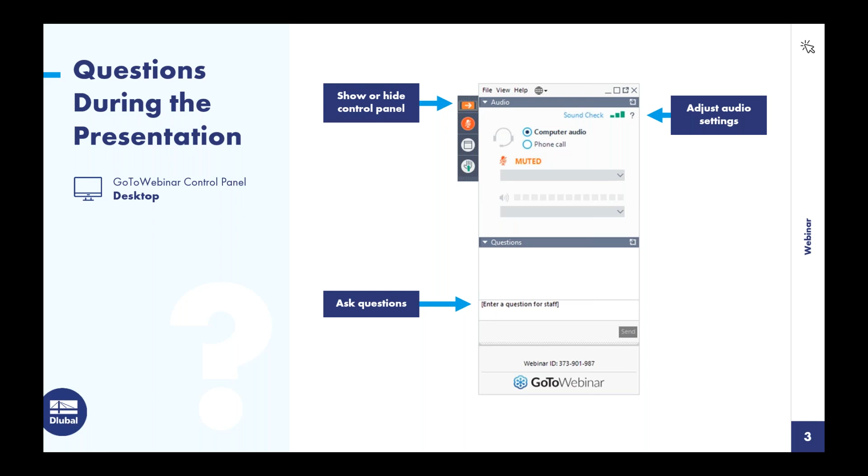Regarding the content over the next hour today, I do want to give a brief introduction to the dynamic analysis add-ons within our FEA program, RFEM 6. We will be taking a look at the natural vibration analyses of our structures utilizing the modal analysis add-on. And we'll also introduce external excitations over time utilizing our new time history analysis add-on in RFEM 6.

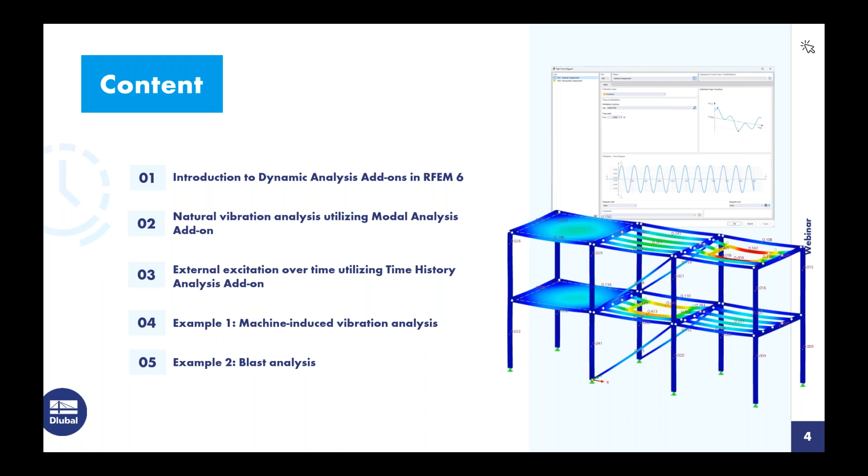We'll be working through a couple of examples. The first is going to be machine-induced vibrations with the structure shown over here on the right-hand side of the screen. And finally, a quick example at the end to showcase a blast analysis, also utilizing that time history analysis add-on.

So for those of you not familiar with our program configuration, RFEM 6 is the base program that allows us to fully model the structure where we have access to the materials and cross sections from the various standards. We can load the structure and run a full static analysis. But when you need dynamic analysis capabilities, it will require one of the 4 add-ons listed here.

The first is the modal analysis add-on. So this allows us to calculate the mode shapes of our structures and determine the natural frequencies, periods, and angular frequencies of the structure. So this is a prerequisite for the additional add-ons that you see listed here. The second is a response spectrum analysis. So this is a seismic analysis according to the ASCE 7, the NBC, and other international standards that we offer.

We also have the recently released pushover analysis. This is a nonlinear analysis for seismic deformation behavior, and currently this is according to the N2 method. And finally, we have our linear time history analysis. So this is to introduce external excitations as a function of time. So today we'll be working in both the modal analysis add-on as well as the time history analysis add-on.

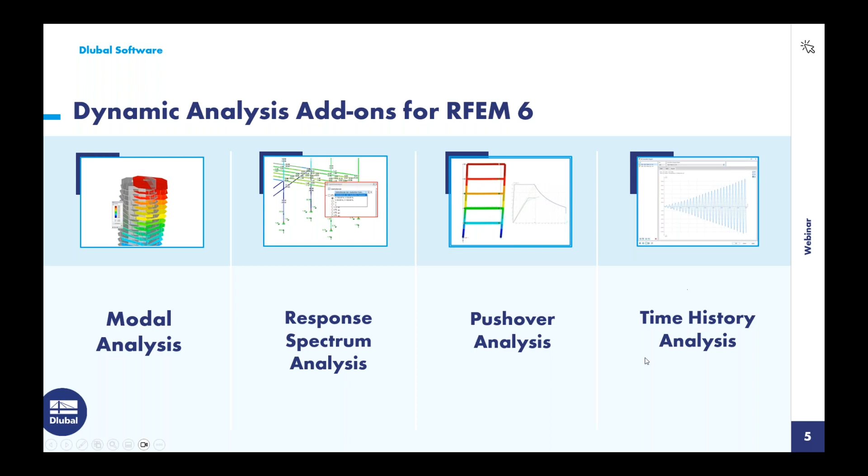So to turn here to the features within the time history analysis, we certainly have improved the integration and the workflow in our new version, RFEM 6. And when we compare this to RFEM 5, it was a little bit of a 2-part process, quite a bit different to open up the dialog box, then to define all of the dynamic time history analysis settings. Now you'll see in RFEM 6 a much more fluent workflow where we can better see that add-on integrated in the main program. We can combine user-defined or function time diagrams with nodal, member, surface, free, and generated loads.

So the point being that we have the ability here to include many different load types in correlation with these time diagrams. We can also combine multiple independent excitation functions for one analysis. We'll see this with our first example today. We do offer the linear implicit Newmark or the linear modal solvers. And it should be known that currently in the program all nonlinear elements for a time history analysis are going to either be ignored or converted to linear elements.

So for example, if you have failure in uplift for a support condition, this will simply be converted to a standard support for that dynamic analysis. Same concept with a nonlinear tension only member. Internally, this will automatically be converted to a truss element. We can consider structural damping with the Rayleigh damping coefficients or the Lehr's damping values.

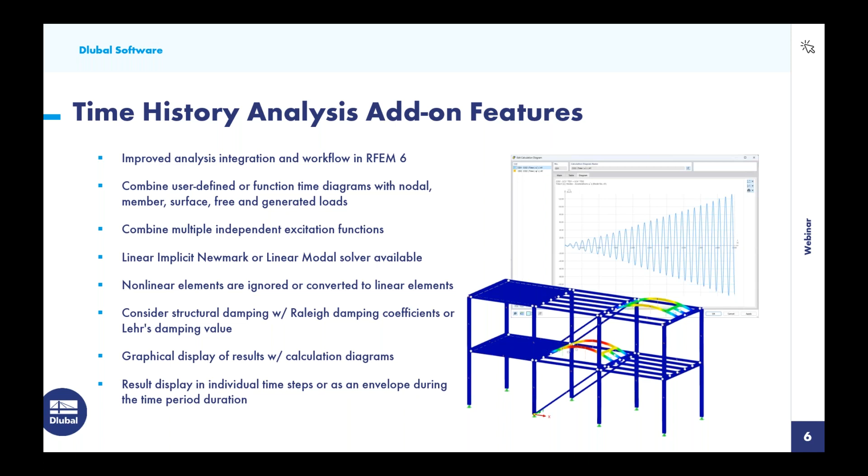And finally, when we do run our calculation, we'll see an output of the graphical results displayed, but also we can create what we call calculation diagrams. So we see a calculation diagram shown over here on the right-hand side, which just gives us a better idea of what's going on with the structure over that total time duration. We can in addition display these results for each individual time step or as an envelope solution during the entire time period. And we'll work through most of these topics today with our examples.

So we'll begin here with example number 1, where we are going to introduce these machine-induced vibrations with the steel industrial structure that you see here on this slide. We have 2 rotating machines, and you can see here where these machines are going to be placed. We have one at the upper level where this opening is on the right, and then at the first level here at the center, we'll place that second machine.

So these machines are operating at 325 rotations per minute. The mass of the machine is 2,000 pounds, or converted to 62.16 slugs. The mass of the rotor is going to be 700 pounds, which converts to 21.76 slugs. And the rotor is going to be operating at an eccentricity of 0.75 inches.

Therefore, we want to calculate the excitation frequency here. So we just simply take the 325 rotations per minute, we divide by 60 seconds, and we get a value of 5.42 hertz. So this is a really important number to remember, and will come into play a little bit later on, but just remember this excitation frequency magnitude here. The angular frequency is calculated by simply taking the excitation frequency, multiplying by 2 pi, and we get 34.03 radians per second.

Now, in order to apply this centrifugal force at these openings, we simply need to divide here by the total length of the members that make up this opening, and that's 33.6 feet. So we get a value here of 0.047 kips per foot that will be applied to the members. So this will make a little bit more sense when we go into our program RFEM to review the structure here.

So as you'll notice, we have our industrial steel structure, and the cross sections are composed of W shapes. So we have a W8x35, we have W6x9, and then for our diagonal bracing here, we have W4x13. We do have a couple concrete platforms here. If we take a look at the thicknesses, these are going to be 4,000 PSI concrete, 6 inches thick.

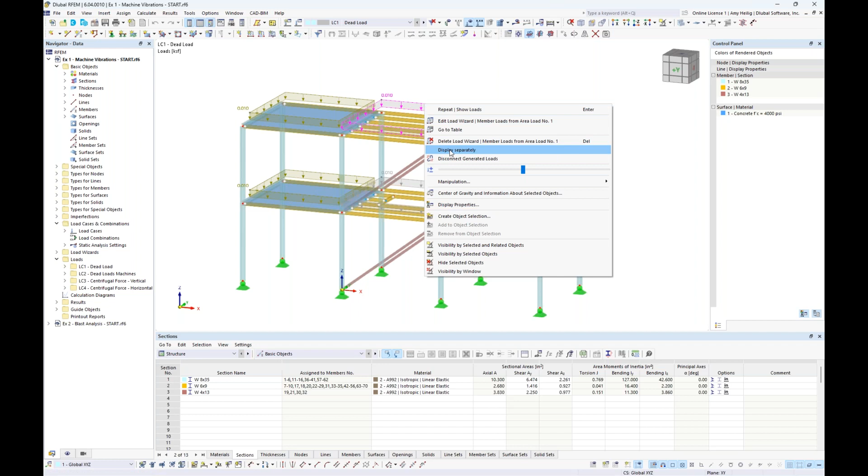So we also have the loads defined. Within the dropdown at the top, I have 4 total load cases at this point in time. We have our dead load, which is automatically going to include self-weight, but notice here that I also have applied an area load. So we have 10 pounds per square foot applied to the structure at both levels. The area load applied over on the right-hand side was used with our load wizard so that we could correctly allocate this to the members based on a one-way area load distribution. So we can right-click to display separately to see those magnitudes here.

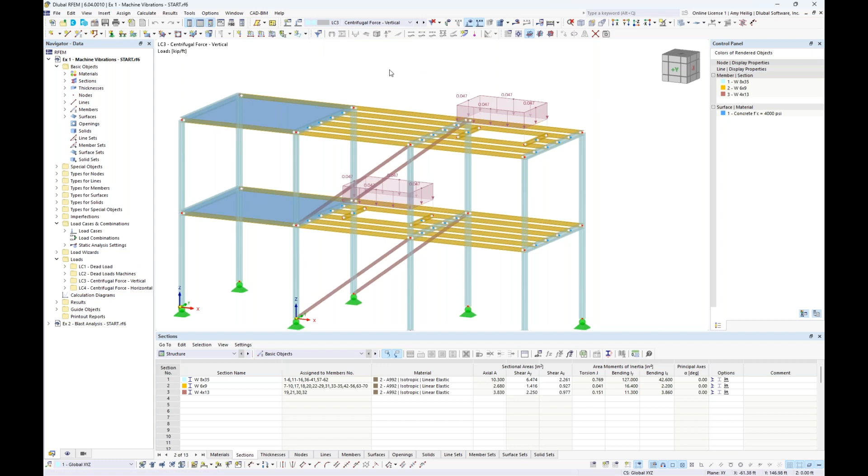Now, in addition to the basic dead load, we also have the dead load from the machine. So this is essentially just the force of the machine sitting on the structure, 0.08 kips per foot. Then going back to the PowerPoint, we have those 2 centrifugal force load cases. So we have load case number 3 here, which is that centrifugal force in the vertical direction. So notice this magnitude 0.047, which again just came directly from the PowerPoint.

If we're curious to know the total length of these members around the opening, we can hold down our control key to select all of these members. You can right click, and under the center of gravity and information, we do see here the total length given to us as 33.6 feet for these selected items.

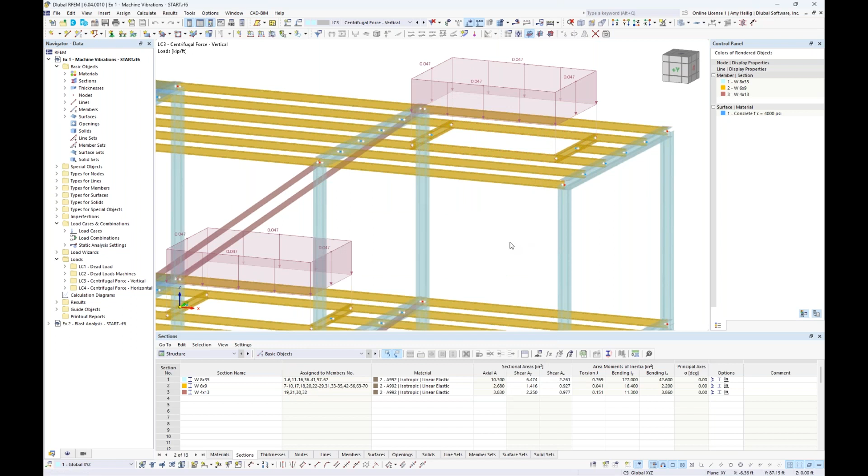So we have the centrifugal force in the vertical direction, and we also have the centrifugal force in the horizontal direction. So identical magnitude here of 0.047, but of course we want it to act in that horizontal position based on the global x-axis here on the structure.

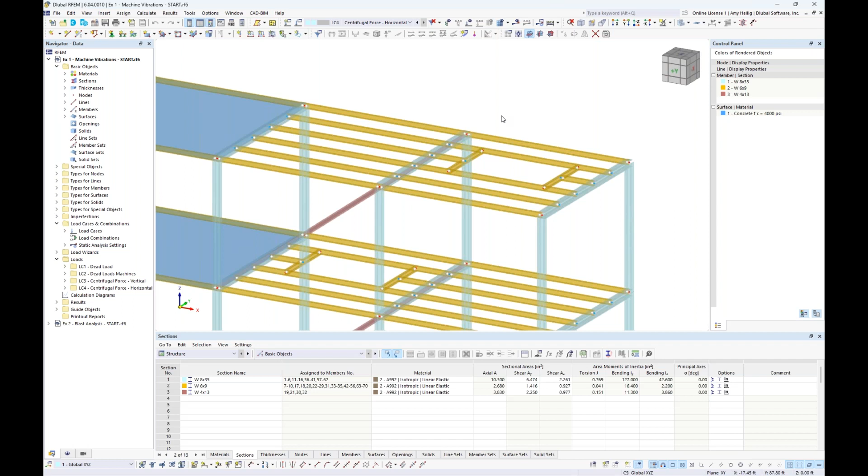So now that we have reviewed the structure as well as the loads, what we would like to move forward with now is our dynamic analysis. And we activate these add-ons by right-clicking here on the model name within the navigator to access our base data. Alternatively, we can launch the base data directly here within our quick tools up at the top.

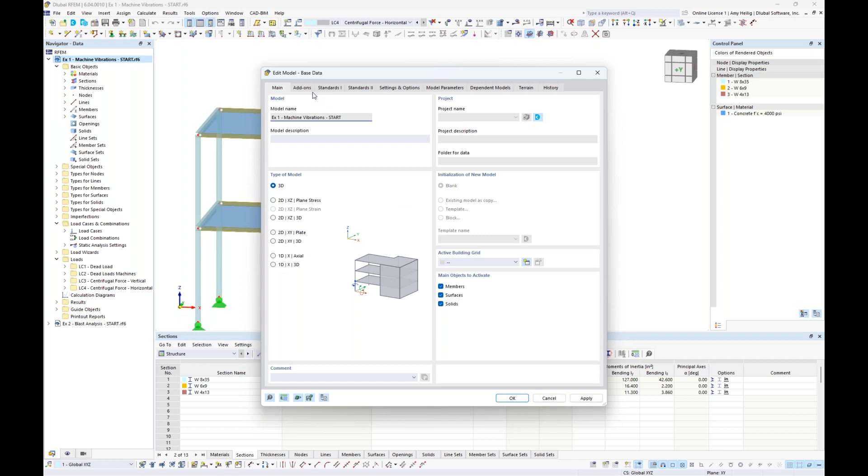So this is the dialog box that would be presented to us when we initially first create the model in RFEM, but we can always access it afterwards as well. Under the second tab here are all of our optional add-ons. So again, RFEM is responsible for the standard static analysis, but we want to activate our dynamic analyses add-ons. And for today, we'll go ahead and turn on the modal analysis and the time history analysis as well.

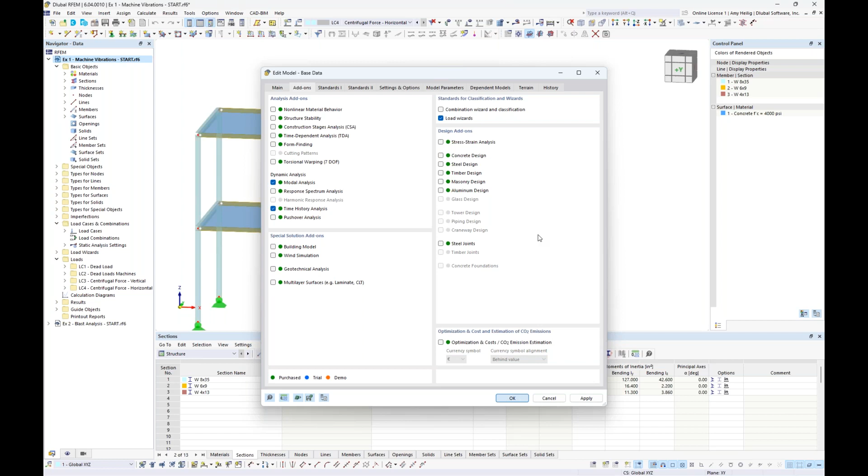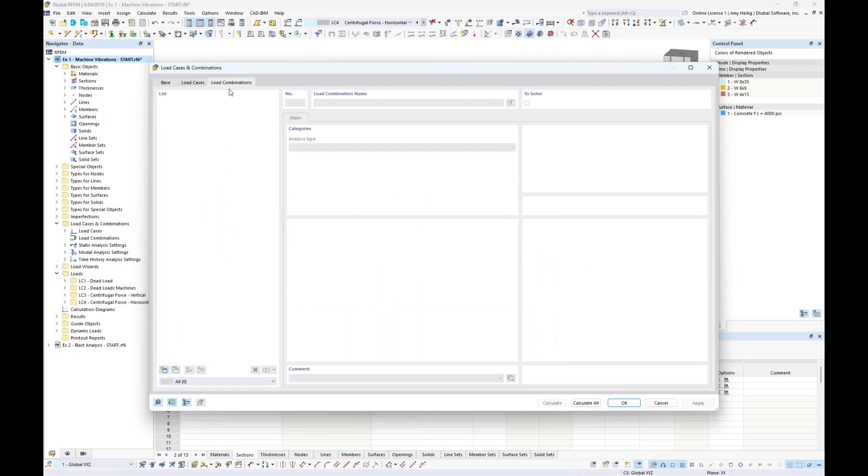So when I click OK, at first glance, it really doesn't appear that much has changed, but we want to move forward now with our modal analysis for this structure to determine what those natural frequencies are, mode shapes, and so on. So we're going to go into our load cases and combinations dialog box. And the initial step that I want to take is under the load combinations. We're going to create a new definition type here.

And in order to carry out the modal analysis, I do need to convert my dead load forces into masses. And I would like to combine the dead load from the structure, so that includes the self-weight, but also that 10 pound per square foot area load, but also take into consideration by adding the dead load of the machines. So both of these will be considered, and we can also rename this one for our mass combination.

So now that we have created this simple mass combination, we go back to our load cases here, and we're going to create a fifth load case. And we're going to give this one the name modal for modal analysis. So rather than carrying out a static analysis, we want to use our dropdown to select modal analysis. And this is available because I've activated this add-on within the base data dialog box.

So here we have some additional settings that we would like to set for the modal analysis in particular. And we do have two default options here. So you could either modify these default options, or you could create your own definition type down here in the lower left corner. For today, I'm going to increase the number of modes to a total of 15 for my calculation.

We'll carry out the eigenvalue problem according to the Lanczos solver, and we're going to utilize a consistent mass matrix here, taking into consideration the mass in the translational X, Y, and Z directions, as well as rotational about the X, Y, and Z axes.

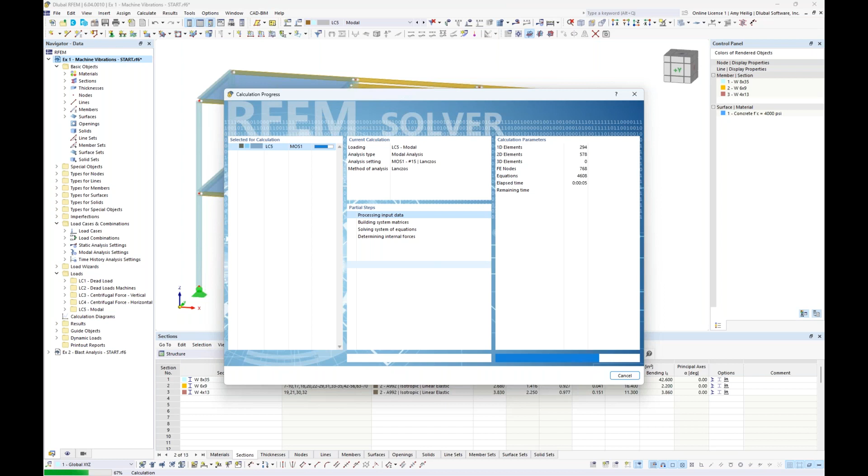So now that we have input in all of this information, we can run our calculation. So the program will quickly run through this modal analysis, calculating a total of 15 different mode shapes. And once the calculation is done, you'll notice that we get a fourth tab over here in our navigator where we can use our drop down here to select one of the 15 different mode shapes that we have solved for. And everything will sync up graphically here to show us our relevant shape.

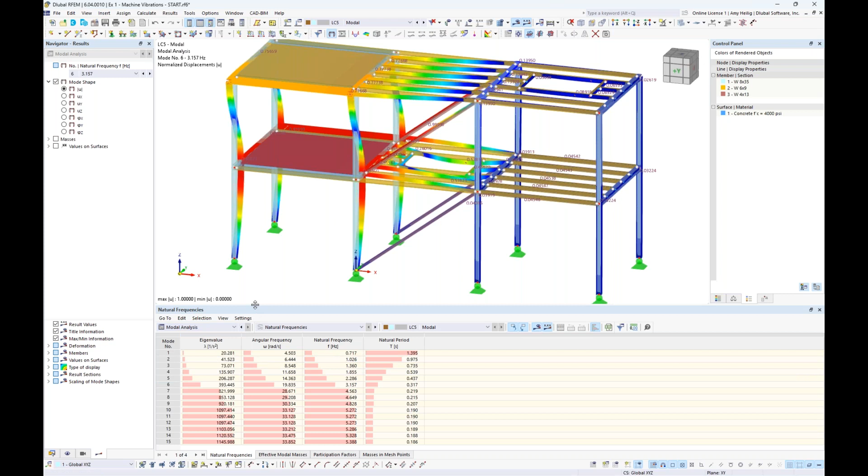But also we have the same information available to us here in the drop down within the table. So we can select the modal analysis. And again, those 15 different mode shapes are going to be shown that we can cycle through graphically within the table format. Now for each of these mode shapes, we also see the relevant angular frequency, the natural frequency, and the natural period.

So it's also important to take a look at the effective modal masses tab. So this tells us our mass participation for each one of these mode shapes, but also the total mass participation down here at the bottom for all 15 mode shapes combined. And we'd like to determine what are our dominant mode shapes for this modal analysis.

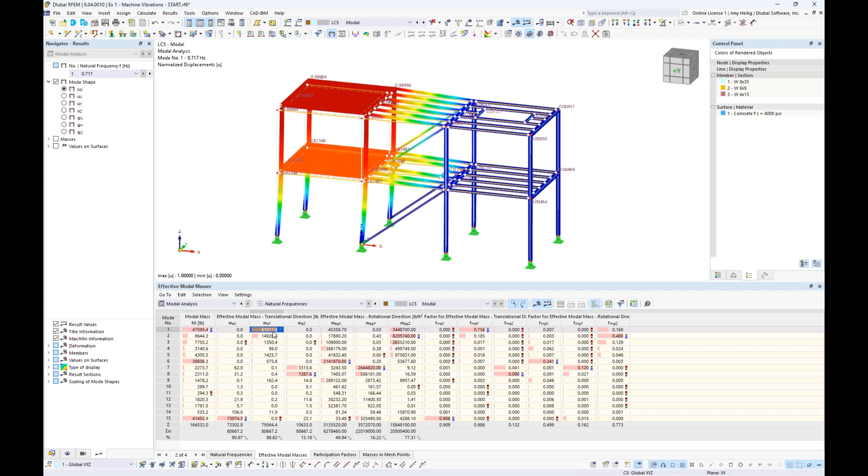So taking a look at mode shape number 1, we can see that this one has the most mass participation in the Y direction. So this is certainly a dominant mode in the Y direction. We take a look a bit further down, it looks like mode shape number 8 would be our dominant mode in the vertical direction or the Z direction.

Pretty relatively low mass participation though in this direction of only 13%. And then finally, further down, mode shape number 15. So this is our dominant mode here in the X direction. We have a total mass participation of 90.87%.

So keeping mode shape number 15 in mind, we go back to the natural frequencies tab, and what you'll see here is a natural frequency value of our structure of 5.388. So this is in Hertz, and if you remember back to the PowerPoint, I had mentioned to keep this value in mind, and you'll notice that these two magnitudes are very close together. So this should immediately tell us that we're inducing these excitations with an excitation frequency that's very similar to the structure itself, that we need to carry out a time history analysis.

And ultimately, we're trying to avoid what we call resonance. So most of you are probably familiar with this term, but it's essentially a phenomenon that occurs when a structure is subjected to an external force or vibration. In our case today, it's these rotating machines that's of similar magnitude to its natural frequency. And this typically results in an amplification of the vibration.

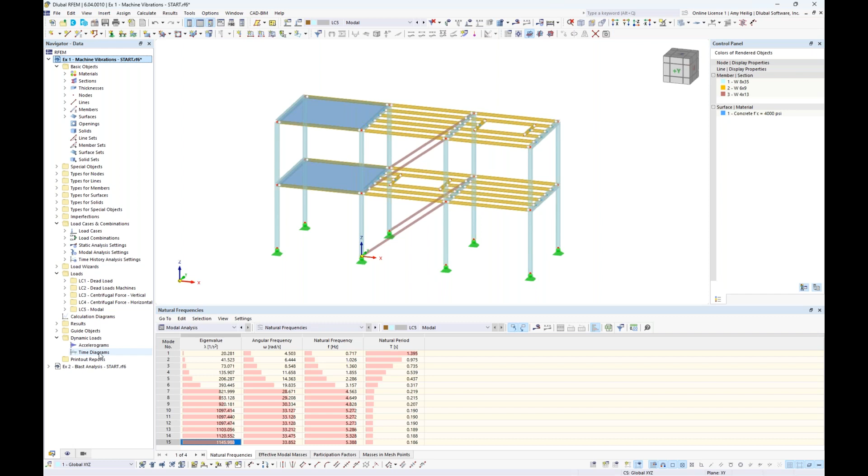So going back to RFEM and knowing that these two frequencies coincide, we'll now move forward from the modal analysis to the time history analysis. So we'll begin with the time diagram. So going back to the first tab here of my navigator, you'll notice that we have a new folder available to us under dynamic loads. And this is only available because I've activated that time history analysis add-on. And we see here where we can create our first time diagram definition type.

So we'll go ahead and click on this, and the dialog box opens where we can input either a user-defined time diagram, which you can see in table format. We can put in the time and we can put in the multiplier, essentially telling the program how this force is going to vary over time on the structure. Now, alternatively, we have the function option, which is what we'll be utilizing for this first example. We can go ahead and rename this time diagram if we would like as well.

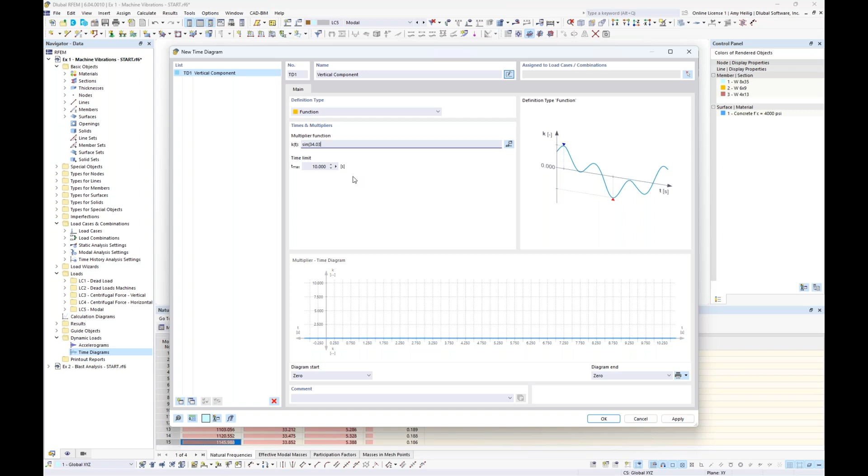So I'll call this one vertical component, and the multiplier function would now be input as a sine function. So remember, we have these rotating machines, therefore we want to represent this as a sine function where we input the sine of the angular frequency, which is 34.03 directly from our PowerPoint, and we multiply it by the time parameter. We'll go ahead and close these parentheses. We set the total time limit here to 10 seconds, which is just default. And we see our diagram populate visually at the bottom of this dialog box.

We then want to make a copy of this time diagram, and we're going to rename this one to horizontal component. Very similar multiplier function here with the sine of the angular frequency, but if you also remember back to the PowerPoint, we have this pi over 2 phase shift that's occurring between the horizontal and the vertical force. Therefore, in order to account for this directly in the formula, we will add 1.57 to account for pi over 2. Again, 10 seconds is adequate.

So if I hold down my control key and I zoom in here with my mouse wheel, we can see this diagram in a bit more detail. So for the horizontal component, you'll notice that at time equals 0, we essentially have 100% of that load acting on the structure. But as we move to a time duration around 0.04, we're going to have 0% of that horizontal load acting on the structure. Now, if we toggle to the vertical component, what we should see here is exactly opposite. At time equals 0, we have 0% of the vertical load, and at time equals 0.04, we have 100% of that load acting on the structure.

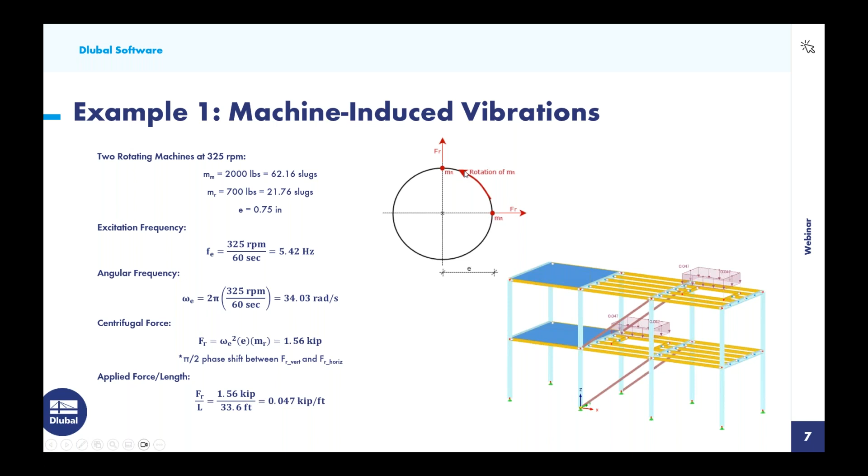So this all just goes back to this simple diagram in the PowerPoint, trying to represent these centrifugal forces as a function of one another. That again, we have 100% of the force acting in the horizontal direction, but at a phase shift of pi over 2, we want to in turn change this so that 100% of the vertical load is acting on the structure. So these time diagrams just relate these static centrifugal forces to one another and how they're going to vary over time.

So now that the time diagrams are available over here in our navigator, we want to go back to the load cases and combinations, where under the load combinations tab, we're going to create a new definition type here, and we can give this one a name of time history analysis. The analysis type is not static analysis, but rather time history analysis, available in our dropdown.

And very similar to the modal analysis, we just need to input in a few settings here. So we'll go into the default definition that's available to us, and notice that we have two options here for our analysis method, either the linear modal or the linear implicit Newmark. So we will be moving forward with the linear modal for this first example.

And this is certainly a more precise, quick, and recommended path forward for the analysis method if the structure has a low number of modes that have been calculated with the modal analysis add-on. This is also assuming that we have sufficient mass participation as well. But underneath the hood, that multi-degree of freedom system is going to be broken down into many single degree of freedom systems, and the solution of that decoupled system is then going to be calculated with the implicit Newmark solver.

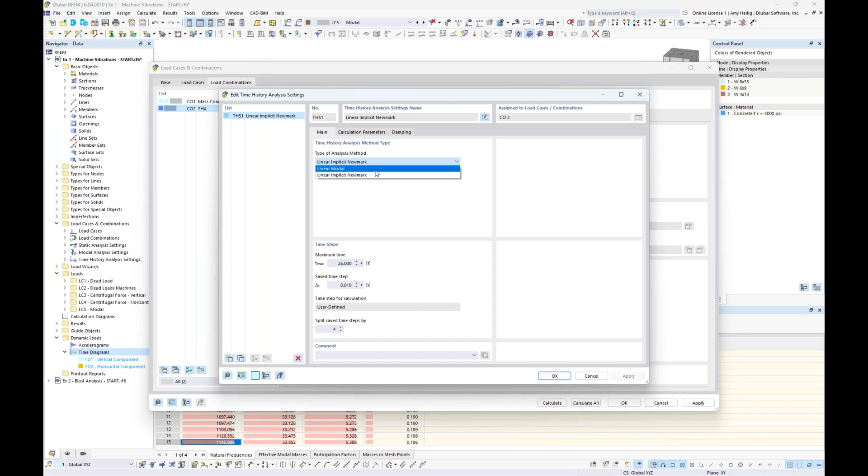Now, the maximum time is the total time duration that I would like to consider for this time history analysis. And for our example today, we will choose 5 seconds. The saved time step is the number of steps you would like to export out back into RFEM to view the results. So obviously we don't want to set this to something too small because it's just going to take the program a lot longer in order to populate all of those results. So we'll leave this as 0.01.

Now, the split saved time steps is further going to divide here the save time steps, but this is what's actually used in the calculation itself. So I'm going to further divide this by 10 so that technically with the actual calculation, I'm calculating every 0.001 seconds, but I'm only going to export out 0.01 seconds for my results.

Now, additionally, you'll notice that we do have a damping tab, and for the linear modal analysis, we have both Lehr's damping available, where we can directly input here the damping constant, quite simple. We also have the Rayleigh damping, where we would need to input the alpha and beta coefficients. Now, alternatively, just to show you, under the linear implicit Newmark, you'll see here under damping that only Rayleigh is offered. So that is required for this calculation method, that alpha and beta.

But we do have a function here in the program where we can automatically calculate from Lehr's damping. So you'd want to determine from the natural frequency analysis, what are your two dominant modes? And from these two dominant modes, what are the relevant natural frequencies? What's the Lehr's damping constant you're trying to achieve? And then the program will automatically calculate both these alpha and beta coefficients. But going back to a linear modal, initially we're not going to put in any damping for our first calculation here.

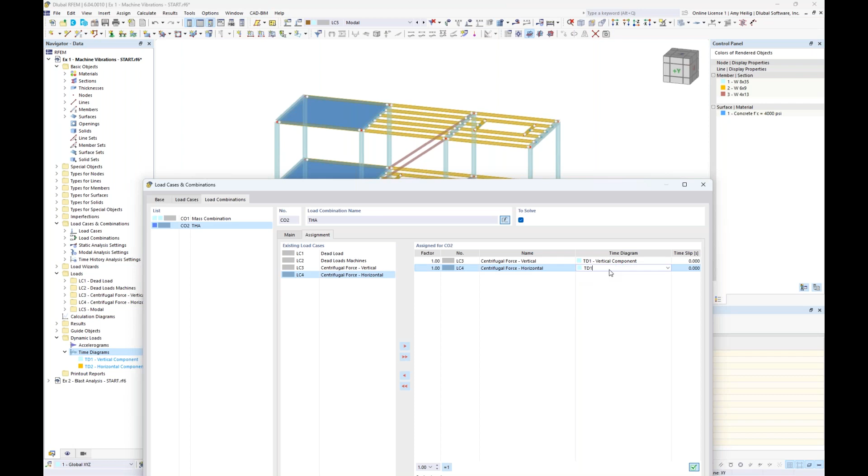And the first centrifugal force in the vertical direction is, of course, going to be related here to my time diagram in the vertical direction. But my centrifugal force in the horizontal, we want to set this to the time diagram in the horizontal direction as well. So now that we have set the static load cases to the relevant time diagram, we would like to run this calculation. Now, we don't need to rerun the modal analysis. The program has already solved for this. Our results are saved here.

And then we move on to the time history analysis, taking into consideration the full 5 seconds here of how these rotating machines will be directly applied to the structure. So once this is done solving, we are presented yet again with our results directly within our navigator over on the left for time history analysis, as well as in our table, we see time history analysis available here as well.

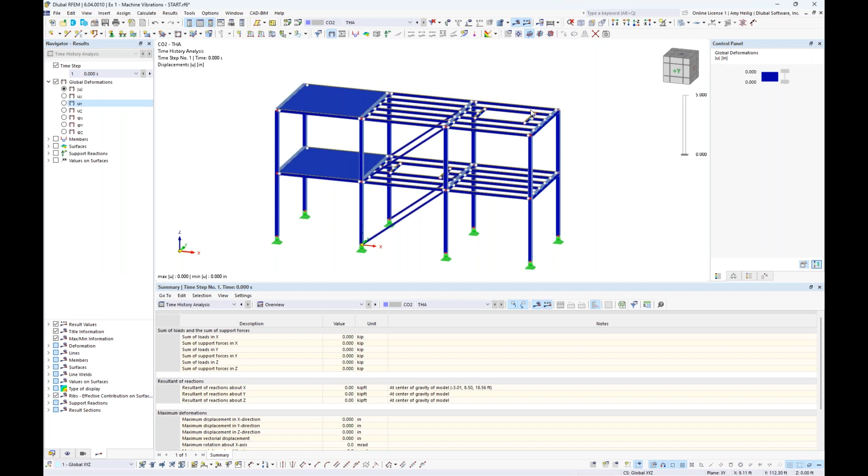So initially you'll notice that the program allows us to view, let's say, the global deformations of the structure based on the relevant time step. So currently at time step 0, nothing's going on with the structure here in terms of the deformation. But as we continue to cycle through these time steps, that's where we start to see the relevant deformed shape based on those centrifugal forces acting on the structure.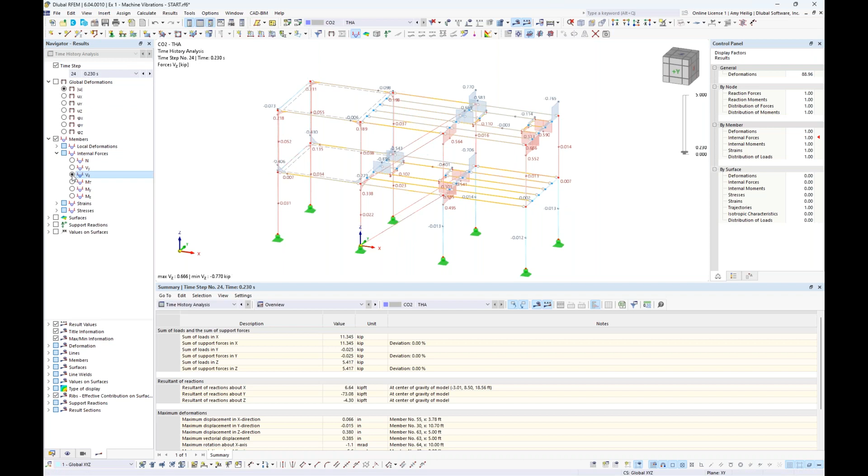And the same concept is available for other result information like our member internal forces. So for example, we can view the axial forces at this particular time step, or we can view bending moments, or perhaps we want to view the shear forces. Surface internal force information is available, and also support reactions. So we can turn those on again for this particular time step.

And all this information is also available here in table format. So we can filter here to the results by the member, for example. And as we click through this table for the internal forces on the member, what else you'll notice is that the program syncs up automatically here to tell me exactly which member I'm looking at. And that red arrow is going to point to where the controlling internal force is that I'm currently viewing along the length of the member.

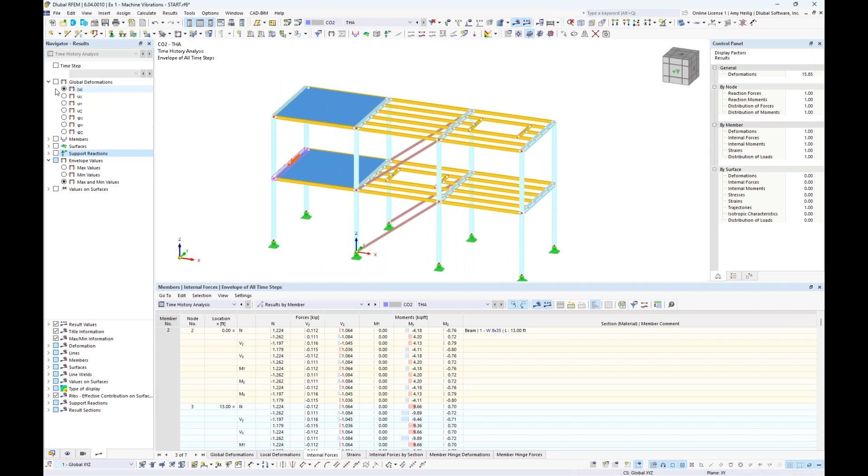So this is for each individual time step, but if we're rather interested in an envelope solution for the full 5-second duration, we can just simply turn off this checkbox. So now the program is going to give us our results here over the total time duration. So we can turn on, for example, the global deformations.

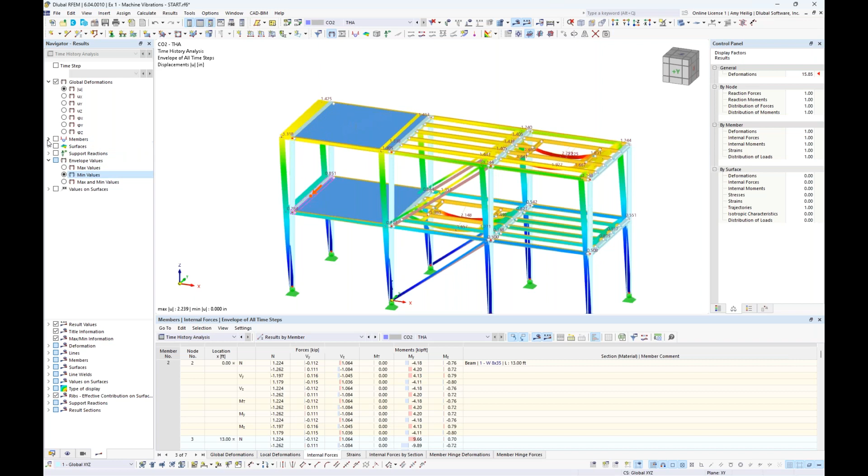And if we look graphically, we're seeing 2 deflected shapes here. And this is just simply because you'll notice under the envelope results that both the max and the min values are currently turned on. If we're interested in only the max deflection, we can toggle to this, maybe only the min deflection. Same concept for our member internal forces. So for example, if we take a look at max and min for our axial forces, you're going to see both of these values displayed on the member, but we could certainly toggle to any one of those other options.

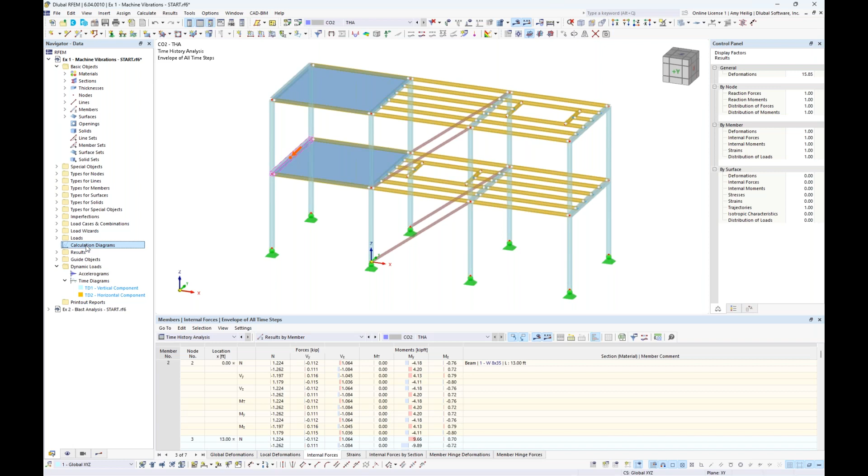Now, all of this information shown graphically is certainly very helpful, as well as in table format, but I do want to go back to the navigator here to discuss the calculation diagram. So I'll go ahead and collapse some of these folders, and you'll notice the calculation diagrams is available here directly within the navigator list. And this is going to be highly used for any time history analysis. So this is going to give us more information about the structure's behavior over the total time duration.

So under the first definition type here for my calculation diagram, we want to toggle this to a time history analysis. Now, the program is automatically going to display a diagram here based on the max deformation. But notice within this dropdown that we really have a lot of different options to choose from, including nodes for the global deformation, maybe want to view the accelerations on the nodes or member internal forces. So I'm going to start here with the global deformations of the nodes, and I'm going to pick this particular node up here at the opening where one of my machines is sitting.

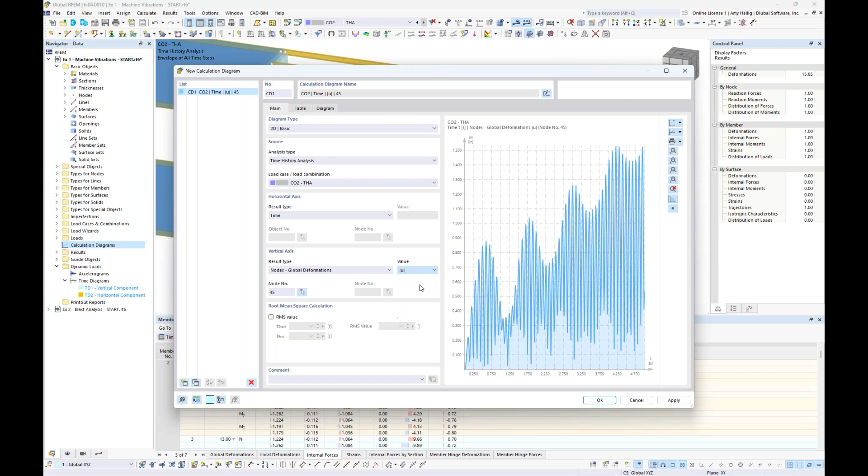And currently the value shown here under this second dropdown is going to be the total deformation, considering all three directions, X, Y, and Z. But instead, I'm going to view the deformation in the X direction only. And when we take a look at this, we can clearly see that resonance is an issue, that this deformation in the X direction is just continuing to grow as time goes on. And likely if we were to expand the total time for a time history analysis, it would just continue to grow. We see here a value of 1.4 inches.

So if we toggle instead to something like our acceleration on this node, and we want acceleration in the global X direction, again, the diagram looks very similar. So if we take a look at the total magnitude here of this acceleration at the end of the 5 seconds, it's 141 feet per second squared. So this is certainly not an acceptable value.

And when we're interested in what are some of the recommended acceleration limits, there's plenty of resources out there. If we take a look at AISC Design Guide 11, for example, it really depends on what your structure is going to be used for. Something like an office is going to have a much lower tolerance value for acceleration versus something like a gym.

But somewhere at the low end, it should be around 0.5% G, and somewhere at the higher end of acceptable tolerance values here is 5% to 10% G. But in any rate, we are far over that with this particular structure. So we need to make some modifications.

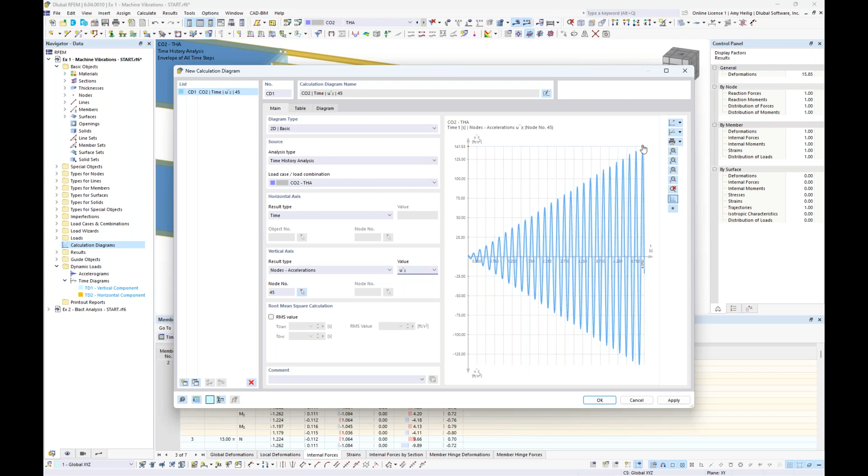And the first thing that I would suggest doing is to consider damping. So we'll go back to the load combination here and that time history analysis. We've already been within these settings before under the damping. So this time we want to consider using our dropdown, the Lehr's damping constant. So for this particular steel structure, we'll go ahead and set this at 0.02. So we'll click OK. The program tells us we need to delete our results and rerun the calculation.

Now, nothing changed with the modal analysis. We should see the same results there. But now with this time history analysis, we've introduced the damping matrix in consideration with the dynamic analysis. So we should see slightly different results here now that we're considering damping.

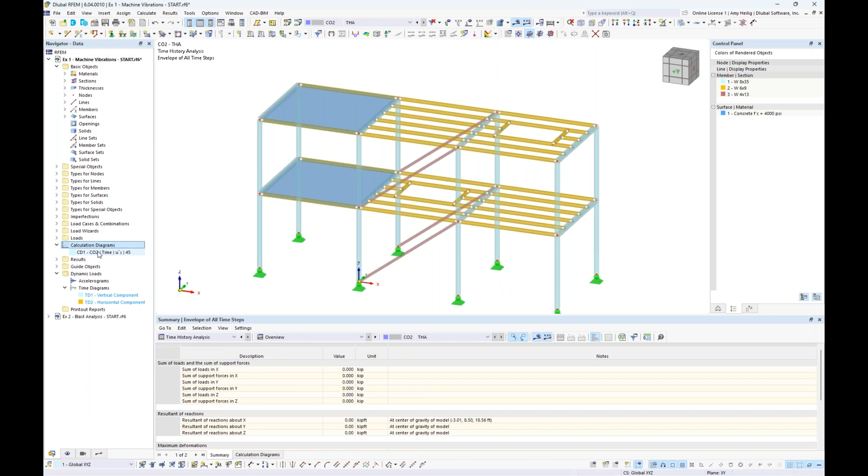So now that this is finished, we will immediately go back to that calculation diagram. So we can see it listed here in our navigator. We don't need to redefine it. It's already been saved. We're currently looking at the acceleration of node number 45 in the X direction, and our diagram certainly looks slightly different. We're not seeing maybe those accelerations growing linearly, but rather leveling off.

If we take a look at the total magnitude of the acceleration, it is around 40.79 feet per second squared. So this is probably still an issue. The acceleration is far too high. So we need to continue to make additional modifications to this structure.

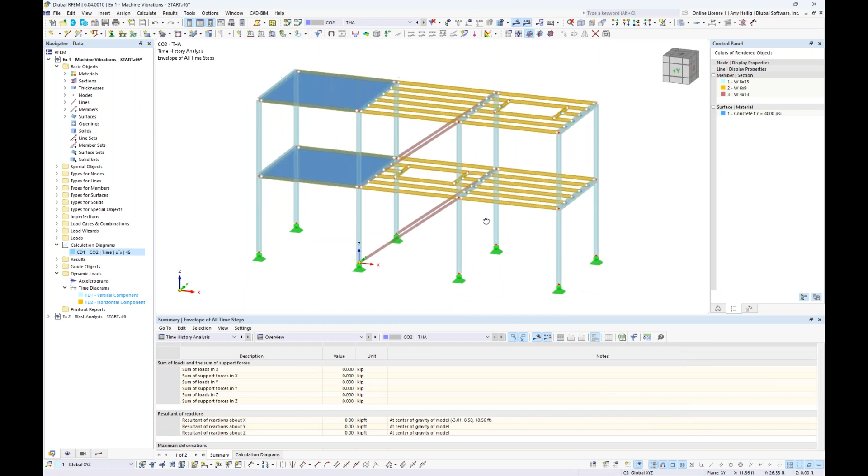Well, the obvious choice would be to change out some different cross sections here. Maybe we can modify the cross sections, which will in turn affect the stiffness, and our modal analysis may output different natural frequencies now that don't necessarily match the rotating machine. So we can do this directly with the cross sections listed. So for example, these diagonal braces, W4x13, we could simply double click and exchange out to a different W section.

But the question might be, well, do we go with a cross section that is bigger? Do we go with a cross section that's smaller? And we could certainly trial and error and keep running through these different calculations. But I'd like to show you a different method, which is available under the special objects folder. It is called the structure modifications.

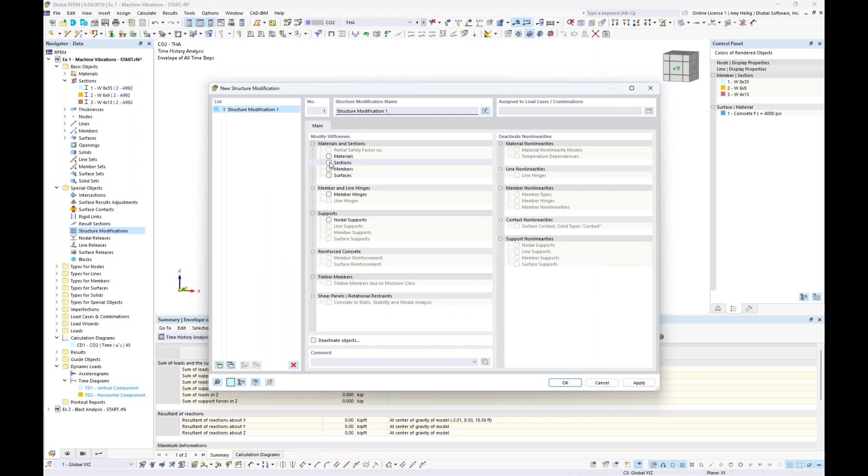And we can go ahead and double click to create our first structure modification where we activate the sections option. And we get a new tab here under sections with our 3 different W sections, including the W4x13 for those diagonal braces. And we have the ability to directly apply a factor to the cross-sectional area, which in turn is going to increase or decrease the axial stiffness of the member used in the calculations.

So rather than exchanging out the cross-section, we can just more or less play around with the stiffness properties directly to see how our structure is affected. So under the W4x13, the first thing I want to do actually here is to give it a name. We'll call this one double stiffness, and the area factor will be set to 2.0. The area in the Y is also set to 2.0, and area in the Z is 2.0. So again, just increasing the stiffness twice the amount here.

Now we're going to make a copy of this structure modification, and we'll call this one half stiffness. So in this scenario, instead of applying a factor of 2.0, we'll apply a factor of 0.5, just to again see how the structure responds to maybe a smaller cross section without actually swapping out those cross sections quite yet.

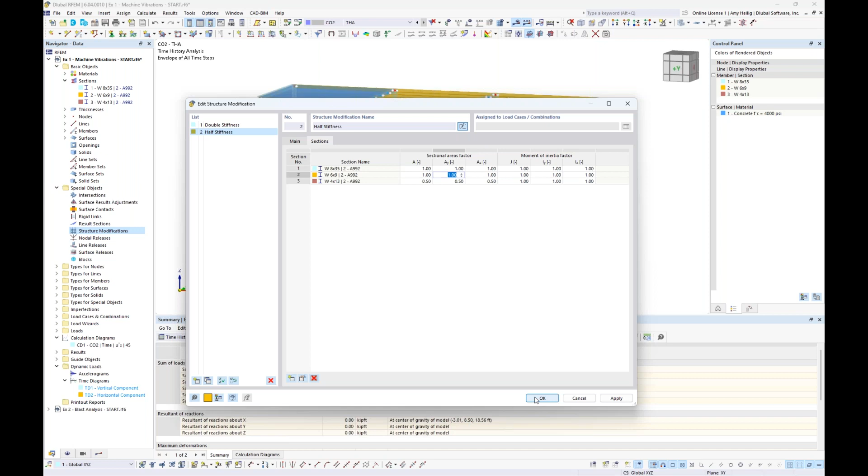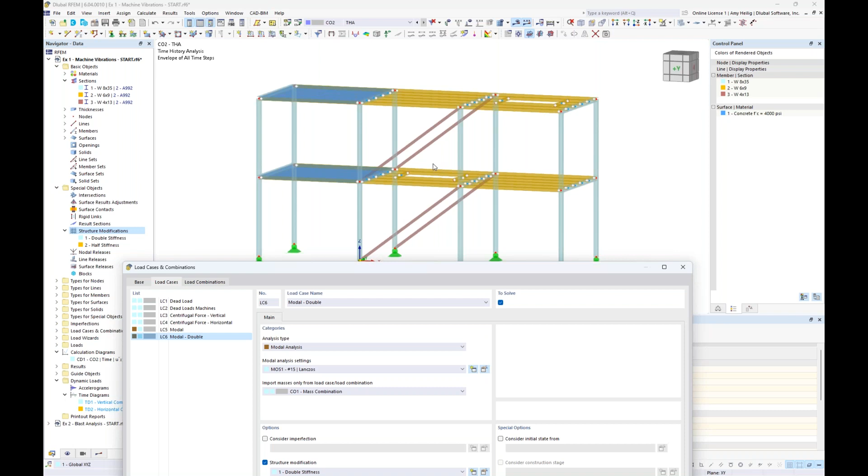So now that we have these structure modifications shown here, we can go back into our load cases and combinations. Under the load cases, remember we have our modal analysis with no structure modification sets, just the original results that we have already looked at. But I'm going to make a copy here, and I'm going to call this one double for double stiffness. Under the structure modification, we can turn on that definition for double stiffness that we just created. Again, where we're going to increase the axial stiffness times 2 for these diagonal braces.

I'm going to make an additional copy here, and we're going to rename this copy half so that we can activate here half the stiffness for the diagonal braces. Well, it's not just enough to do it for the modal analysis, but we also need to apply this to the time history analysis. So again, I can simply create a copy here, and with our original time history analysis, we will first rename it, but notice that with the linear modal, we can now import in the modal analysis where we have increased the stiffness by 2.

The program automatically detects that we also want to apply this structure modification to the time history analysis, because remember we have these dynamic load cases that vary over time. So we need to also apply that stiffness modification to this scenario here.

And we make an additional copy, and in a similar manner, we call this one half, and we're going to import in the modal analysis with half the stiffness set. And then you can see here the structure modification half stiffness is also set for the time history analysis.

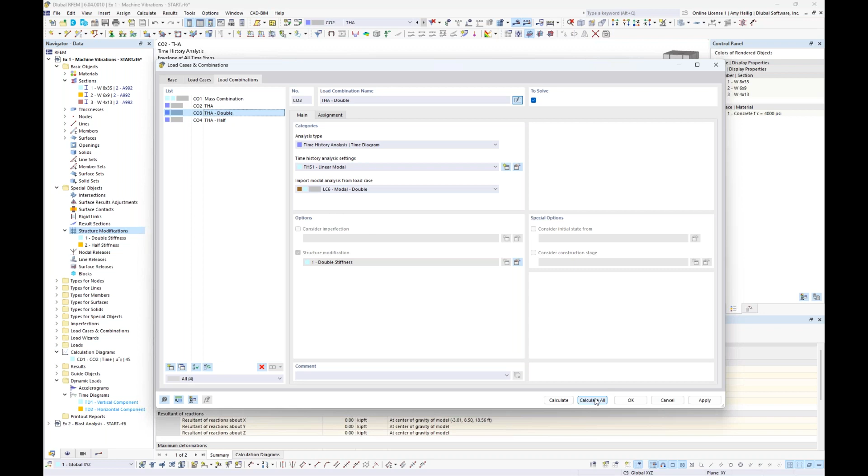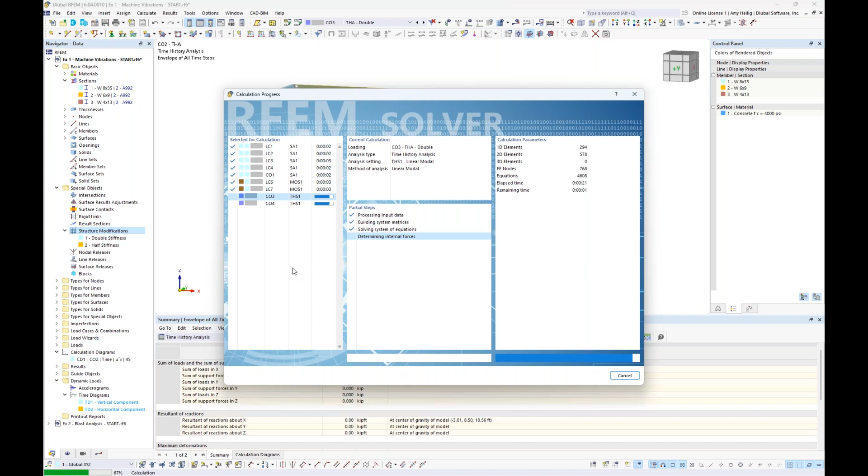Okay, so now that these are run with the relevant stiffness properties or modifications set, we can just go ahead and click calculate all. So this is going to cycle through first my load cases here, which is fine. We're not really concerned with them. But then you'll also notice that the program is going to go ahead and calculate both of those modal analyses with the stiffness modification set, and then we're now running through both time history analyses with the additional stiffness modifications.

So the first thing that I'll go to now that the calculation is done is those calculation diagrams. So we'll go ahead and double click on here, and we see the same calculation diagram, but that's fine because we're still referencing that original time history analysis with the same cross section, same stiffness, nothing changed.

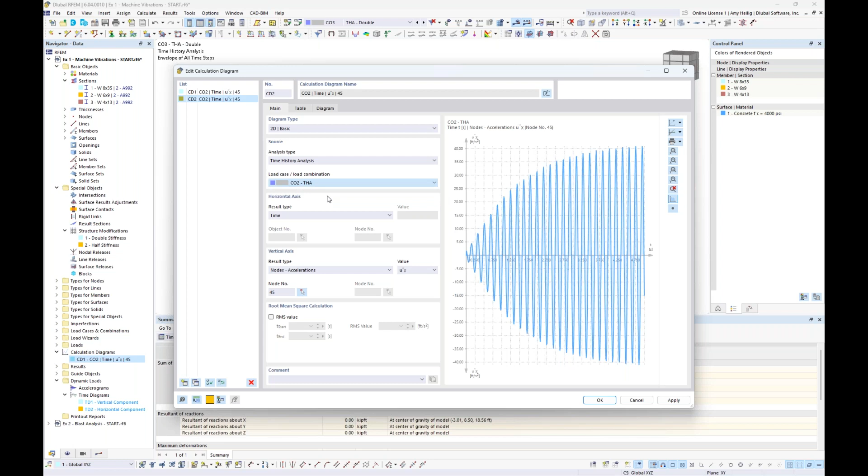We make a copy of this, and this time we want to reference the time history analysis with the double stiffness. And now we see that our acceleration of that node in the X direction looks quite different. No longer do we see that acceleration growing, but rather it remains pretty constant over the 5-second duration. And if we take a look at the total magnitude of the acceleration, it's now around 0.4 feet per second squared. So this is much better and well within those tolerance values.

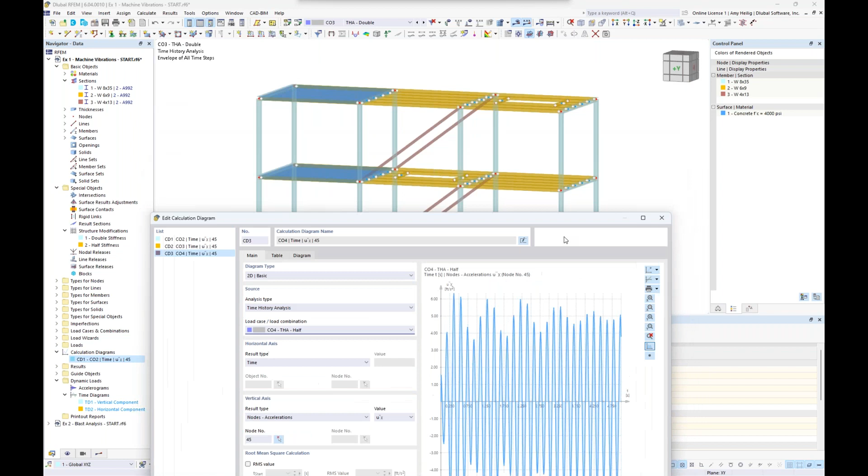Perhaps we make an additional copy here to select half the stiffness. Again, resonance is no longer an issue, so we don't necessarily always have to increase the cross-section size. Even decreasing a cross-section size may allow you to overcome issues like resonance. However, we do need to still take a look at the total acceleration values, a little bit higher here, around 4 to 5 feet per second squared.

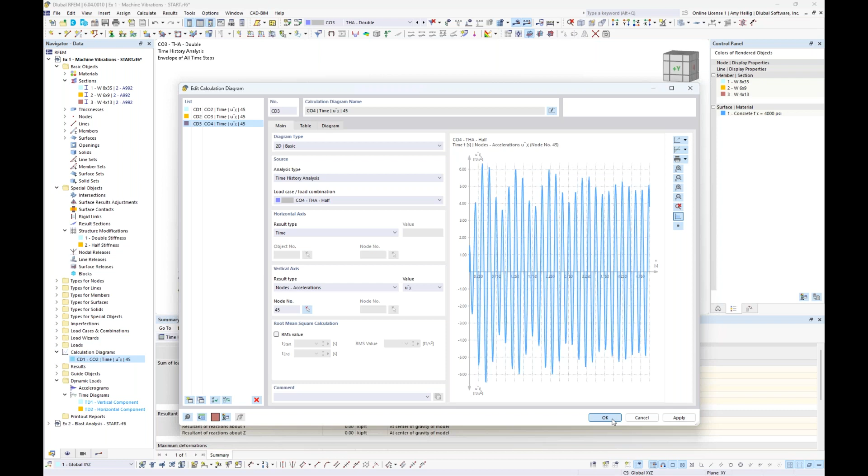So it'd be up to you as an engineer to determine, okay, is this within the allowable range, or do we need to make further modifications? But once we have an idea about the general stiffness options based on those factors, then we can go in and make modifications to that W shape.

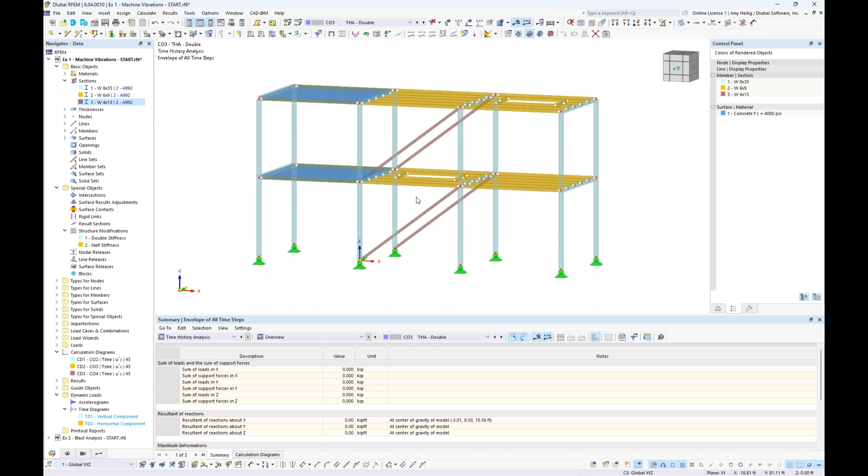Okay, so that will conclude our first example today with these induced vibrations on the structure. We now want to turn to our second example. So we'll go back to the PowerPoint here, and this is going to be blast analysis. So with the blast analysis, we certainly can utilize these same add-ons, a time history analysis add-on, to replicate a blast analysis on a structure. So very simple example for today.

So we also want to replicate this with a user-defined time diagram. So you can see that triangular shape shown over here on the right-hand side. So let us go into the RFEM model directly, where we'll go ahead and toggle to this open model here.

So you'll notice that for this very simple example today, we have a 32-foot high cylindrical structure, 33 feet in diameter. Really consists of a single surface here. And if we take a look at the thicknesses, it's going to be A36 material, 2 inches thick. Also, we have a pin support down here at the bottom that is applied as a line support.

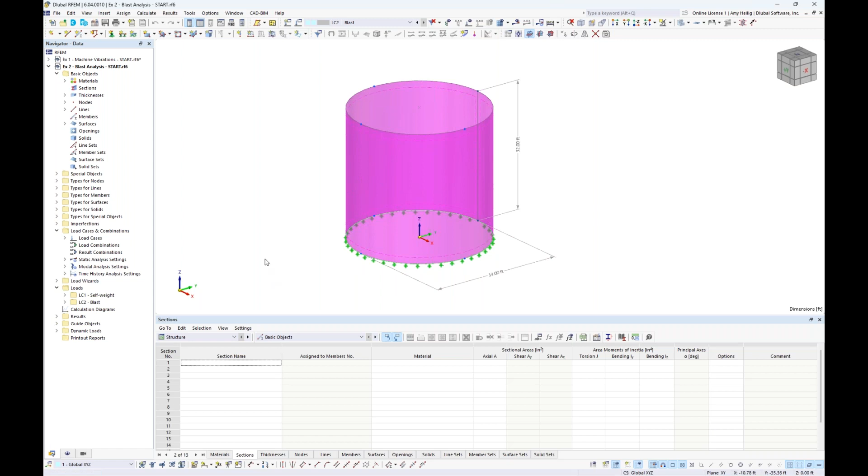We also have the loading applied. So we have 2 simple load cases for this example. We have the self-weight, which no additional loads are applied to the structure, just internally that self-weight is considered within this load case automatically. But then we also have that blast load. So this comes from the PowerPoint and the reference mentioned, where we wanted to vary this load around the perimeter.

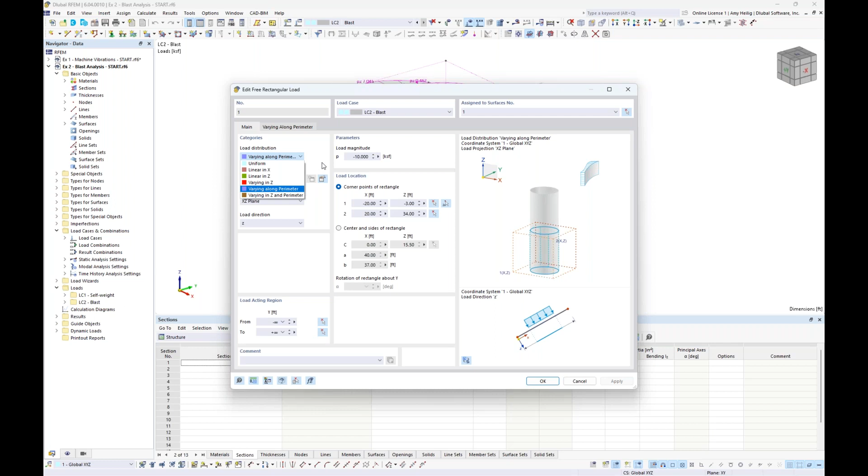And we take advantage here of what we call a new free rectangular load. So with the free rectangular load, if I go ahead and double click on the options here, you'll notice that the load distribution can be set to varying along perimeter. And I also wanted the load to act normal to the face of the surface. So this is based on the local z-axis of the surface itself. We also need to input in here a reference load magnitude, so -10 kips per square foot.

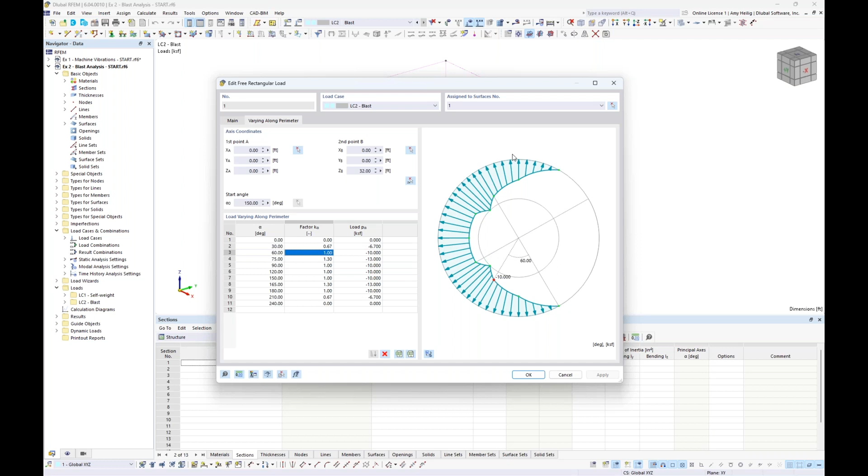So taking a look now at the second tab that is available, we see in table format where we can input in degrees. So this first column, 0 degrees, 30 degrees, 60 degrees, and so on. We can also input the relevant factor. So again, this just comes from the PowerPoint, and then the program will automatically take this load magnitude here and the parameter set in this table to calculate the total load acting on the structure and how it should vary, again, as we kind of move around the perimeter. So that's a little bit about just the basic static load that is applied here as a general load case.

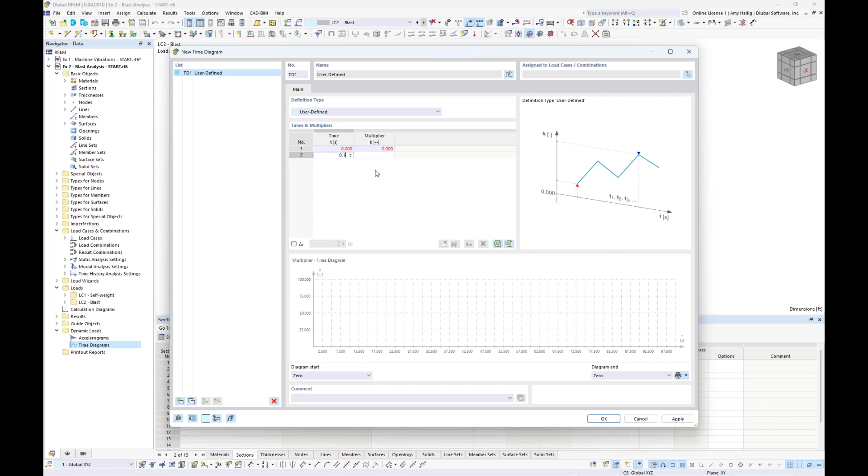Now, we want to define that time diagram. So I will go into my navigator over on the left in the dynamic loads folder, where very similar to the last example, we just double click here the time diagram. And this time, instead of using the function, we want to set this to user defined. And for a very simple application today, at time equals 0, we want a multiplier of 0. At time equals 0.15, again, just referencing the PowerPoint, we want the multiplier to be 1. And then finally, at time 0.3, we would like the multiplier to be 0.

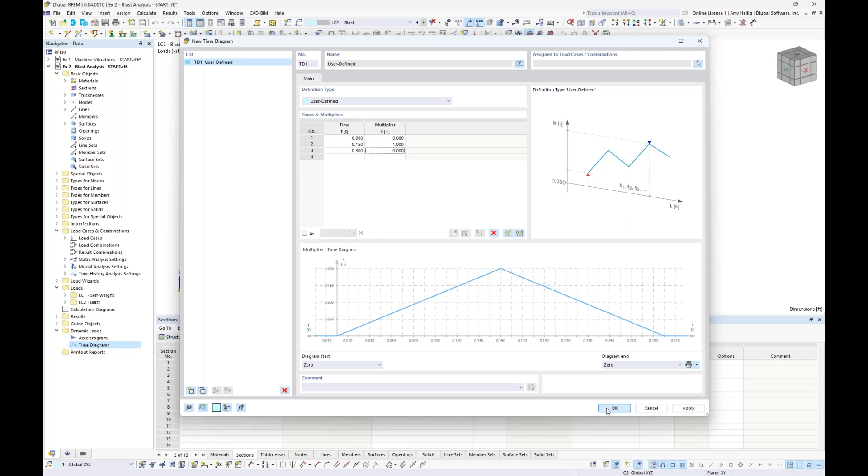So we see this triangular shape displayed here that will be used to tell the program how this static pressure load that's shown here in the background is going to vary over time. So a very quick impulse, so to speak. So we have this single time diagram defined. So we click OK, we see that listed over here in our navigator. And we want to go into the load cases and combinations.

So I will preface that for this particular time history analysis, I'm going to run a linear implicit Newmark solver. So this is in contrast to the linear modal solver. What this means is that I don't need to run a modal analysis. So everything that we saw in the first example, that modal analysis was required because we were running the modal solver. And unless we're interested in determining what the structure's natural frequencies are, periods, mode shapes, and so on, we really don't need to run the modal analysis calculation here in the load cases for a linear implicit Newmark solver. So immediately we jump to the load combinations instead.

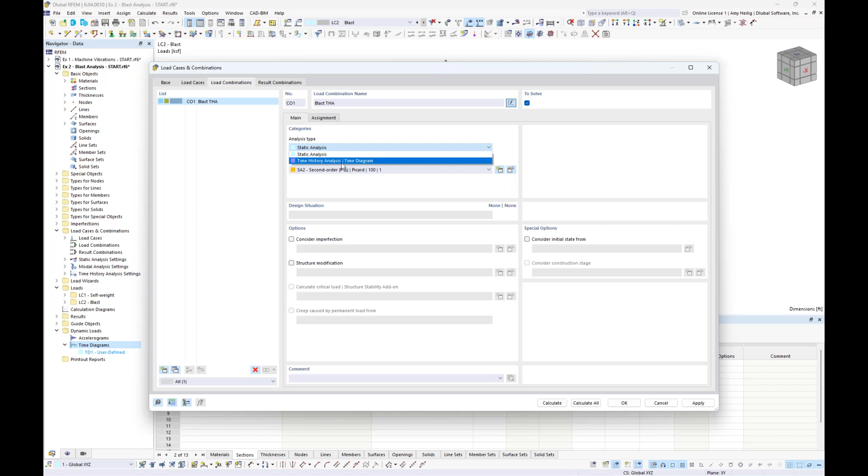We create our first definition type here. And the load combination name can be set. We will call this one BLAST time history analysis. You'll see here that the analysis type is set to time history analysis rather than static. And very similar to our last example, we have our settings. Now, the type of analysis method here is set to linear implicit Newmark. The total maximum time is going to be 1 second. So typically with a BLAST analysis, we don't need to carry out the time history analysis over a long duration of time just because that load impulse is so quick. So 1 second should be adequate here.

The save time step will be set at 0.01. And then we further want to split the save time step here by 10. So remember that this is the value that's actually used here within the calculation. So we'll technically be using 0.001 for this linear implicit Newmark calculation, but we're going to export out every 0.01 seconds into RFEM to view those results graphically.

Under the calculation parameters, so because we are not running that modal analysis, you'll also see here just some additional settings specific to the mass matrix for the linear Newmark solver. The type of mass matrix will be set to consistent, for example, acting in the translation directions as well as rotation about those global axes. And then we also have the same mass conversion type, similar to what we saw in the modal analysis in example 1.

And finally, we have the damping. So for this example, I'm not going to consider damping, but it's worth pointing out again, remember that with the Newmark solver, we only have the ability to define Rayleigh, or we can allow the program to convert from Lehr's damping. Again, we'll leave all of these values as 0.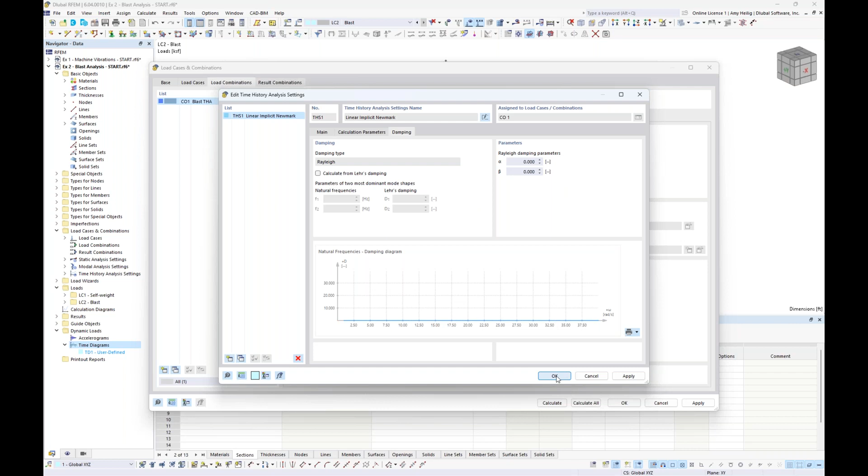So we need to import in the masses from either a load case or a load combination. We don't have any mass combinations that we created for this example. Rather, I'm just going to import in the masses from self-weight alone, and that's available within this first load case.

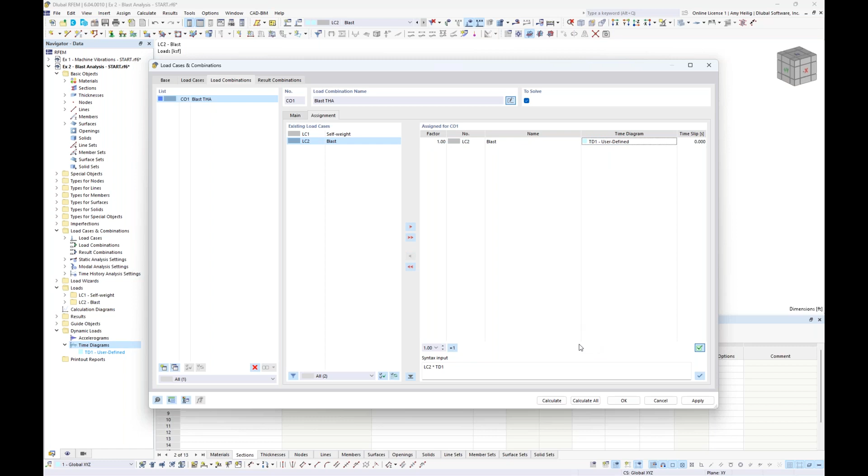And finally, we have the assignment tab where we take this blast load, and we can see it displayed on the structure here as a standard static load, and we relate this to the user-defined time diagram, and that was that triangular development of load versus time, which is automatically set here because we only have one time diagram defined now in the model. Okay, so now that these are set and correlated, again, how this pressure is going to vary over time, we are going to run the calculation.

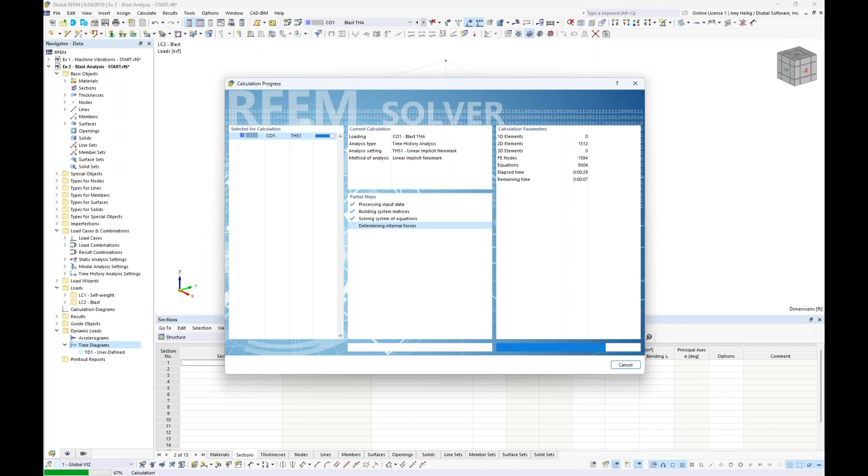It should be known that we're not running through the modal analysis, but rather directly to that time history analysis. With the Newmark solver, it does take just a little bit longer. And I had mentioned that when we were talking about the modal solver, it is a bit quicker, it's more precise, but can only be used when we have adequate mass participation and we're carrying out that modal analysis with relatively low number of mode shapes. But regardless, we'll carry out the time history analysis here for the full 1 second duration.

And once those results are done solving, we see them presented here back in RFEM. So we'll go ahead and turn off the display of our loads. So you'll notice initially we have the time history analysis available in the navigator, same concept for the table, just like what we saw in example 1. And if we toggle to the time duration of 0 seconds, as we would expect, that pressure wave has not been applied to the structure yet.

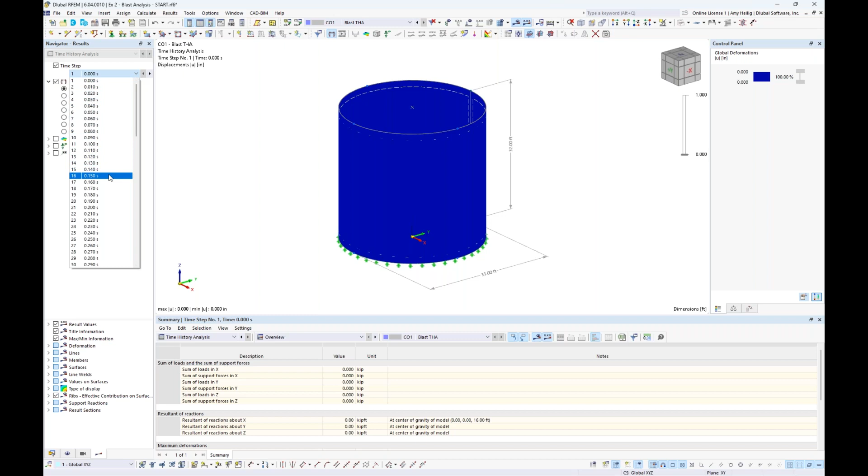But if we cycle down here and choose time equals 0.15 seconds, this should be the highest global deformation of the structure because that's 100% of that pressure wave being applied. And then as we cycle through these additional time steps further out, we're going to see that deformation slowly decrease because we're going to apply less and less of that pressure on the structure.

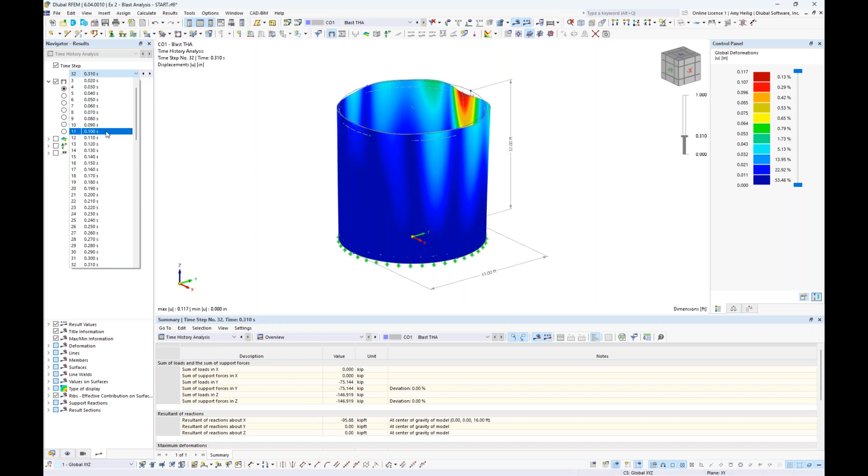We also can view information, if we maybe back up here to 0.15 seconds, such as the surface stresses. So we can activate here the stresses. Maybe we're interested in the von Mises stresses. So we find that under the equivalent stresses here, we can activate von Mises, and we can go ahead and see this graphically within the structure. Now, this is all for this particular time step.

So again, keep in mind if you're interested in an envelope solution, let's say showing the maximum von Mises stresses, we would just need to simply turn off this checkbox. This is going to show us, based on what we have set here under the envelope value, either the max or the min von Mises stresses over the full 1 second duration.

So again, we want to turn back to our initial navigator here to access our calculation diagrams. So we'll go ahead and create a new calculation diagram here, and we're going to activate the time history analysis. We only have one time history analysis under the load combinations available. Notice that the program automatically defaults here to this first option, showing us the maximum deformation of the entire structure over that 1 second time period. And exactly as we would expect, what we see here is the max deformation around time 0.15 seconds until that load dissipates based on the time diagram that we have defined.

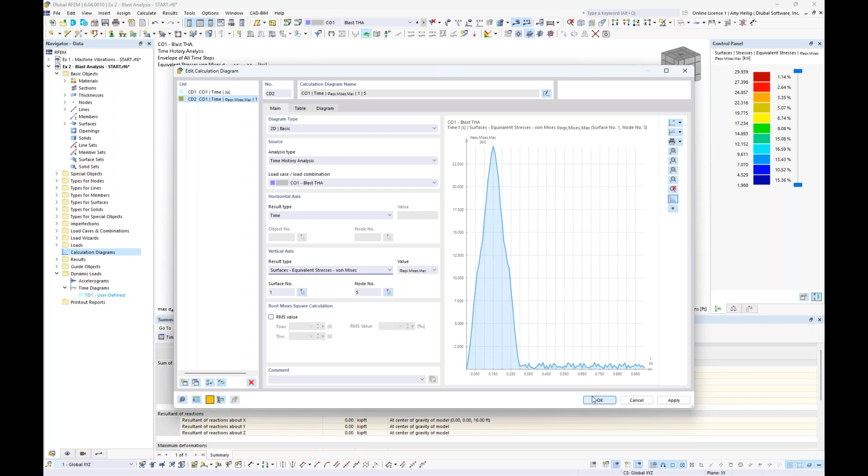Okay, so that should give us just a very quick example of a blast analysis and how we can also utilize the time history analysis add-ons. The final thing that I just want to quickly point out is we might be wondering, how do we combine the results of our time history analysis with additional load cases or additional load combinations?

So you'll notice back under the base data, first of all, I haven't generated any load combinations automatically to the standard, but you could certainly turn this on here with this checkbox and select the ASCE 7 or the NBC. For today, everything was code independent, but what I did turn on was the result combinations, and we get this additional tab here, and we can also activate what we call sub-results.

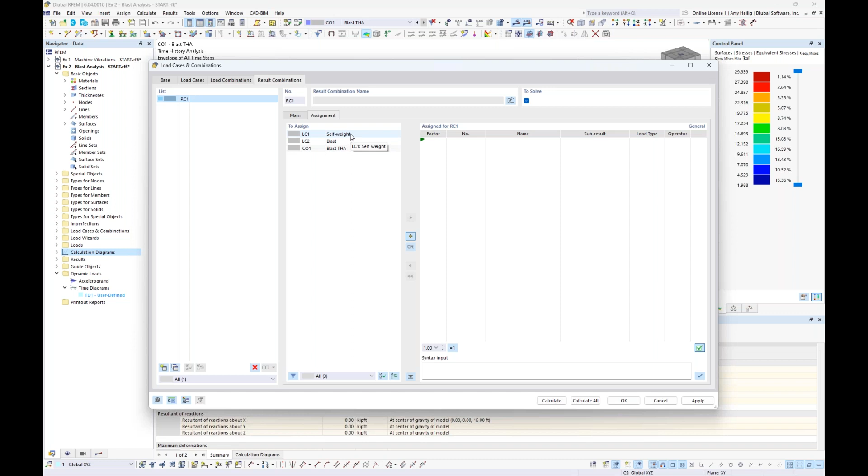So now with the result combination, I create a new definition type, and this allows me to combine any load case, load combination with those dynamic analysis results. So for example, if I wanted to combine self-weight with the time history analysis from the blast, we can go ahead and do so by moving both of those over here on the right.

Now, it should be known that these are linearly combined because we take the results of load case 1 and add them to the results of this time history analysis. So everything is done linearly. The load type can be set here to permanent, so if we always want self-weight acting, same concept for the time history analysis. Transient just means it's alternatively acting in order to give us the worst case scenario or envelope solution here.

The sub-results option that we checked under the base tab here allows me to choose a particular time step. So for example, if I choose time step number 16, these results will then be combined with self-weight. Alternatively, if I'm interested in an envelope solution, I could choose this option all. So that way the envelope results of the max and min are combined with the self-weight.

And we can create multiple result combinations here, combining different time steps. We can rerun these calculations down here at the lower right-hand corner, and then we can view our results just like what we've seen up until this point.